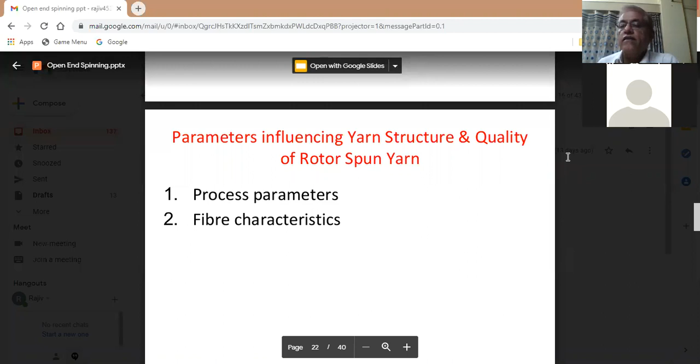In the last lectures, we were discussing parameters influencing yarn structure and quality of rotor spun yarn. There are two types of parameters: process parameters and fiber characteristics. We discussed process parameters like opening roller wire profile, opening roller speed, rotor speed and rotor diameter. Today we will discuss rotor wall angle and rotor groove angle. We have discussed up to rotor diameter so far.

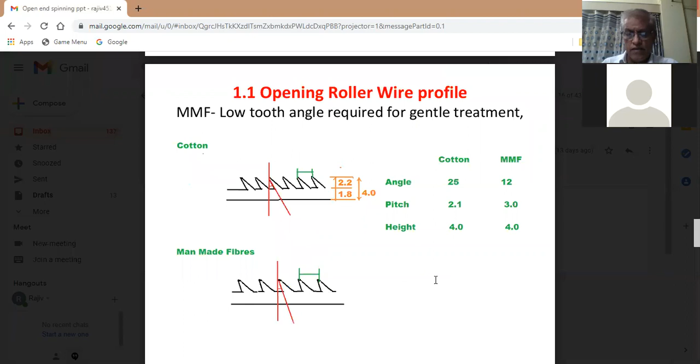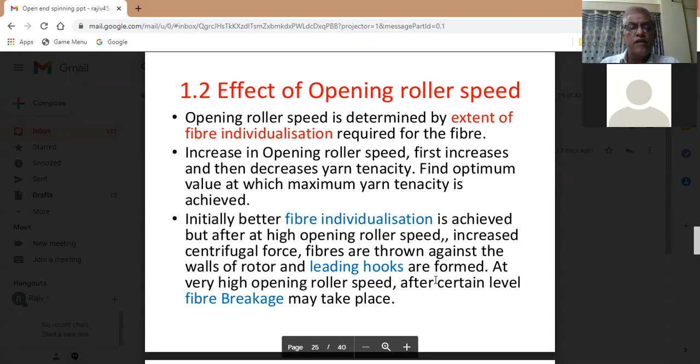In the previous lectures, we discussed opening roller wire profile for processing cotton and man-made fibers on rotor spinning. We studied that angle of the wire is different for cotton, and for processing man-made fibers low tooth angle is required because they require gentle treatment. We also discussed the effect of opening roller speed, and there is an optimum opening roller speed which depends upon rotor speed also. Opening roller affects fiber individualization, and very high opening roller speed may result in fiber breakage also.

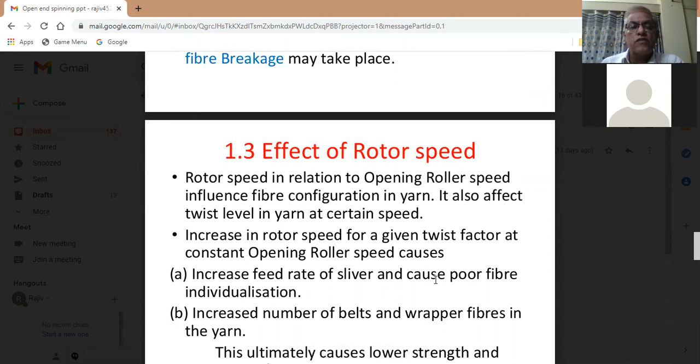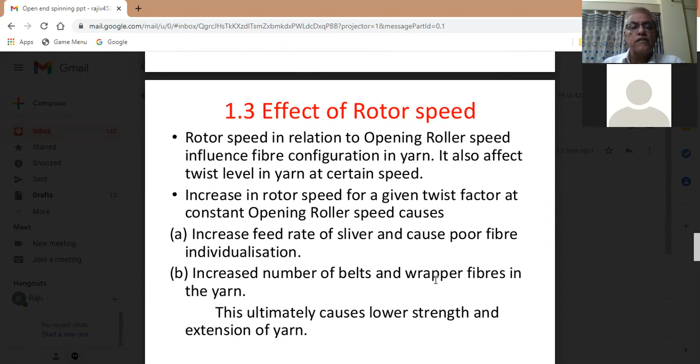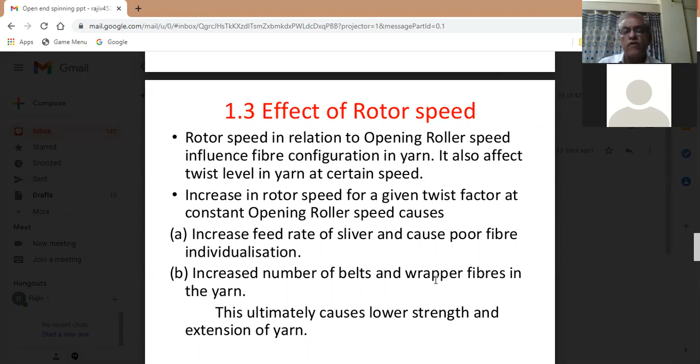Then we discussed the effect of rotor speed. The rotor speed in relation to opening roller speed influences fiber configuration in yarn, and increase in rotor speed for a given twist factor at constant opening roller speed causes increased rate of feed and increased number of wrapper fibers. In all this discussion, we have to take care that the tension in the yarn should not exceed 10 to 20% of the average yarn strength, because if the yarn tension is more, breakages will be more.

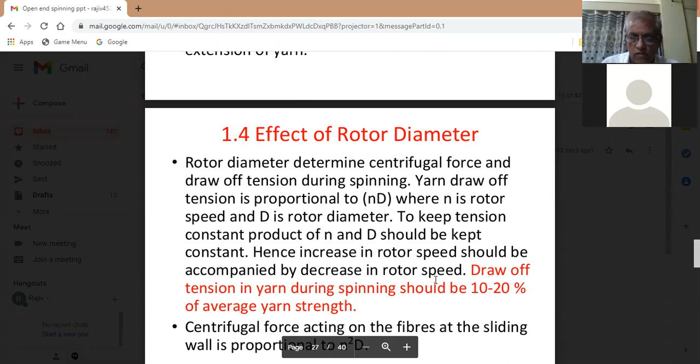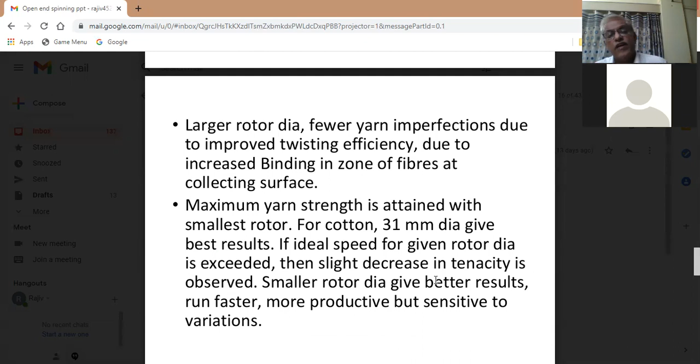After this, we discussed that larger rotor diameter results in fewer yarn imperfections due to improved twisting efficiency. So for a particular fiber, a particular rotor diameter is used generally, and for cotton, 31 mm rotor diameter is used. For different types of rotor diameter, different rotor speeds are used. In a nutshell, as smaller the rotor, higher rotor speeds we can achieve.

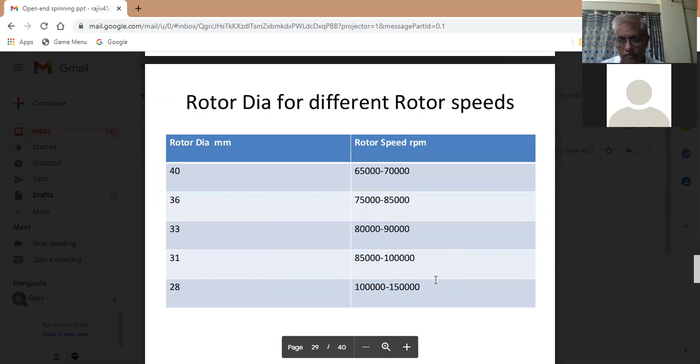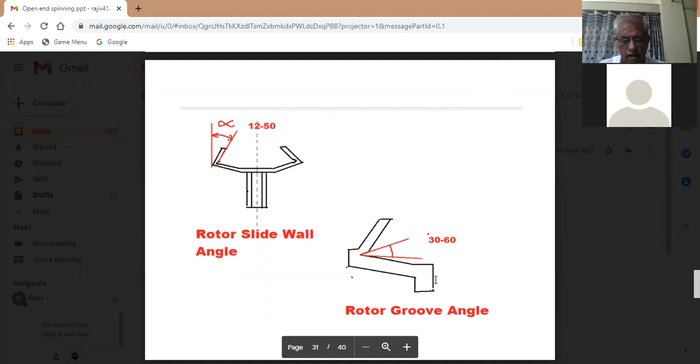Now we will study the effects of change in rotor slide wall angle. As we know, fiber reaching the rotor surface will finally be deposited at the rotor groove in the form of layers. So fibers are deposited layer upon layer in the rotor groove, and wall inclination is necessary. It cannot be vertical because fibers emerging from the feed tube and passing onto the wall can slide downwards. So inclination will affect how the fibers are sliding downwards. The angle of the rotor wall to the vertical, alpha, ranges from 12 to 50 degree.

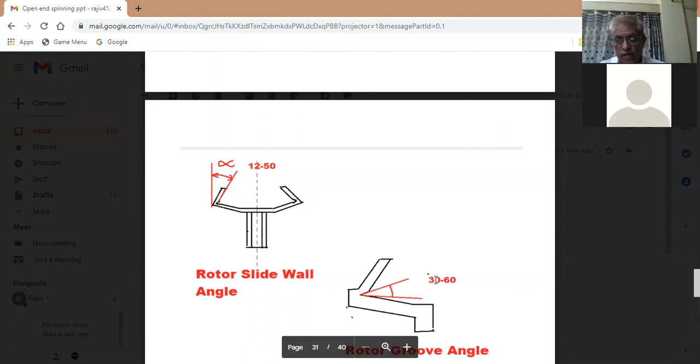So for higher rotor speeds, the angle of inclination should be small. This means that as we go for high rotor speeds, angle of inclination should be small. This angle will ultimately affect the sliding of the fibers along the wall of the rotor, and it ranges from 12 to 50 degree. So for different rotor speeds, the rotor wall angle will be different.

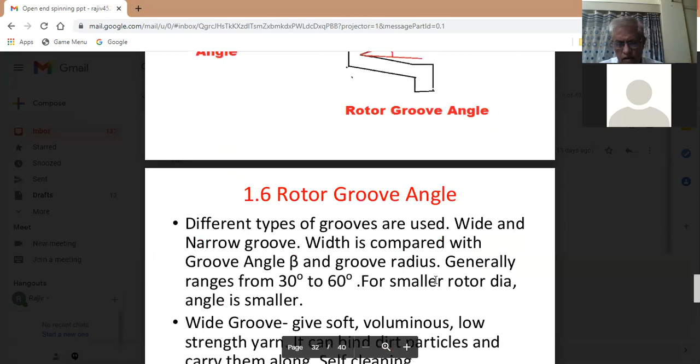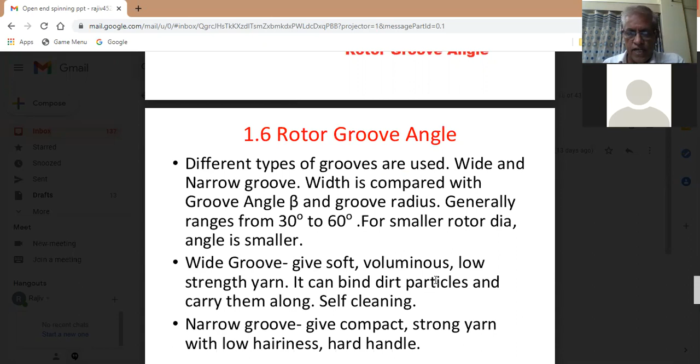Now we will discuss rotor groove angle, and how it affects the yarn properties. Different types of grooves are used. We will study in the coming lectures that it is not only the rotor groove angle, but its shape, its angle, everything affects the yarn properties. At present, we are studying rotor groove angle. Different types of grooves are used: wide and narrow groove.

So width is compared with groove angle beta and groove radius. Generally it ranges from 30 to 60 degree. For smaller rotor diameter, the angle is smaller.

How does it affect the yarn properties? If it is a wide groove, it will ultimately give us soft yarn, voluminous yarn, low strength yarn. It has another important feature: it can bind dirt particles and carry them along. Because it is a wide groove, self-cleaning effect will also be there. Self-cleaning means the dirt particles will not deposit in the groove, but will go along with the material. This is called self-cleaning.

If we are using narrow groove, it will give us compact yarn, meaning diameter will be lesser, and stronger yarn with low hairiness and hard handle. So it will feel hard. It gives compact yarn, strong yarn with low hairiness and hard handle.

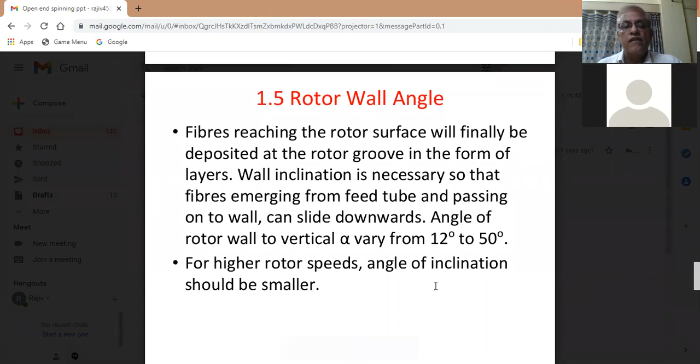So today we have discussed two important parameters: rotor wall angle, where for higher rotor speeds the angle of inclination will be smaller, and rotor groove angle, which is generally 30 to 60 degree, where for smaller rotor diameter the angle is smaller. This will affect yarn properties: if it is a wide groove, it gives soft, voluminous, low strength yarn along with a feature of self-cleaning; if it is narrow, it gives compact, strong yarn with low hairiness and hard handle.